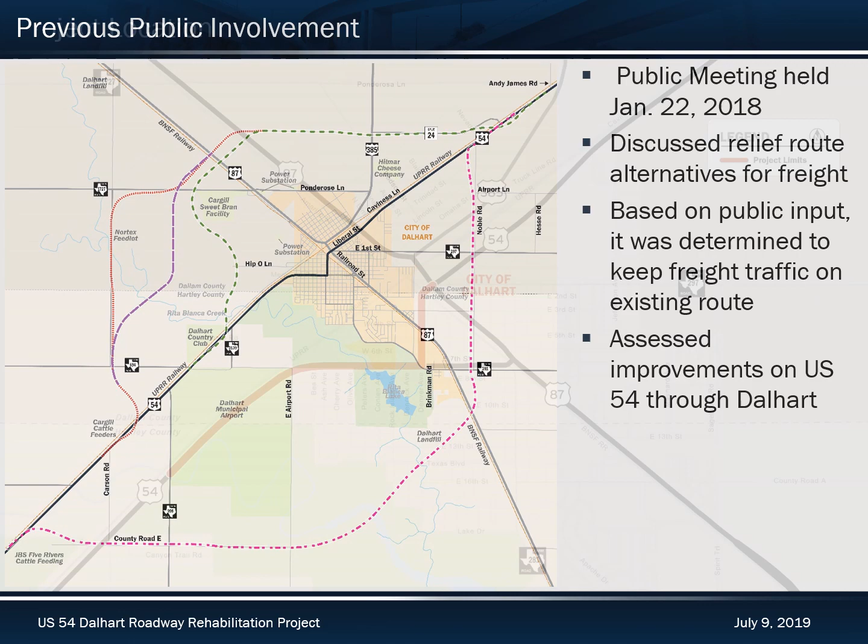The US 54 Roadway Rehabilitation Project limits extend along US 54 into the City of Dalhart for approximately 1.8 miles, from the Rita Blanca Creek Bridge to US 87 in Hartley and Dallam counties. The US 54 facility is part of the Texas Highway Freight Network and is a primary southwest to northeast thoroughfare through the City of Dalhart. The project is needed because the current freight traffic is resulting in a deteriorating asphalt roadway.

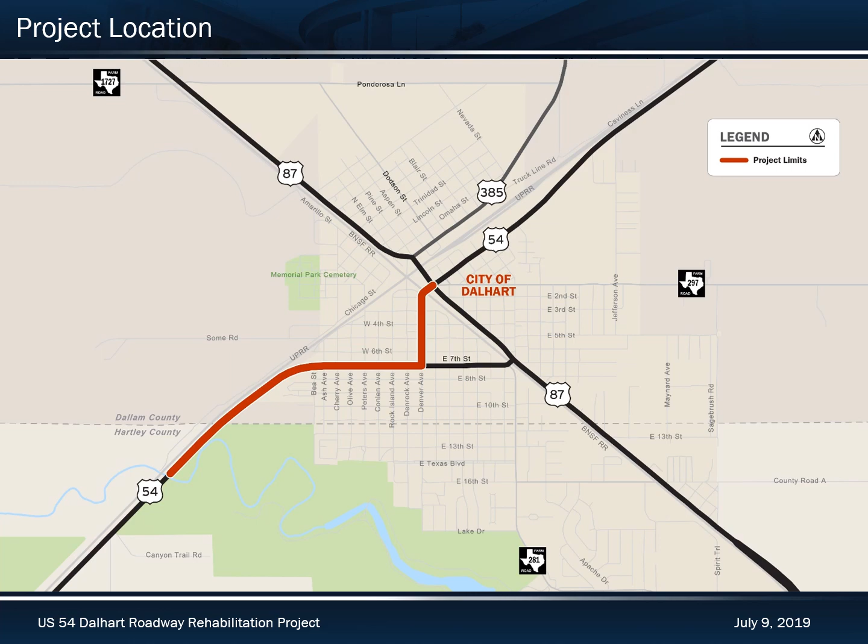The project scope includes rehabilitating the existing US 54 roadway from the existing pavement to long-lasting, durable, low-maintenance concrete pavement. Between the Dalhart city limits and the 7th Street Denver Avenue intersection, the project proposes a 3-lane section. Between the 7th Street Denver Avenue intersection and US 87, the project maintains a 4-lane section. We will discuss these sections in more detail later in the presentation.

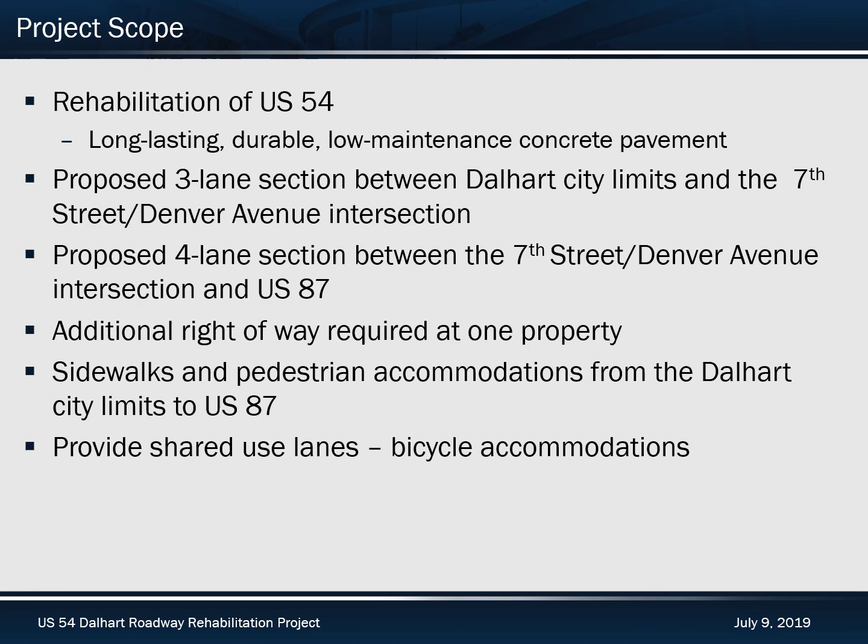The proposed project does require additional right-of-way at one property in order to improve truck turning movements. There are no residential or commercial displacements. TxDOT staff can assist you should you have questions regarding the right-of-way process. The project will also include sidewalks and pedestrian accommodations from the Dalhart city limits to US 87 and shared use lanes for bicycle accommodation.

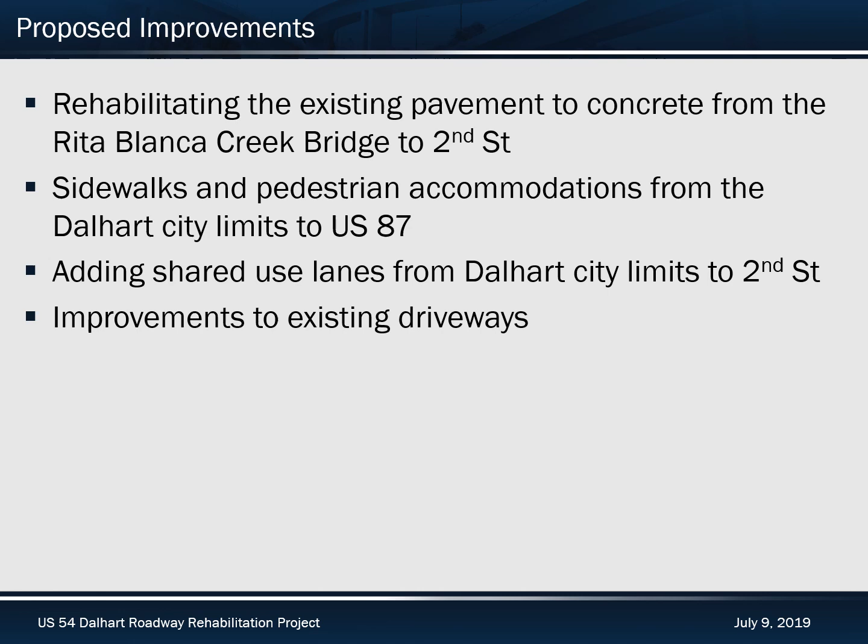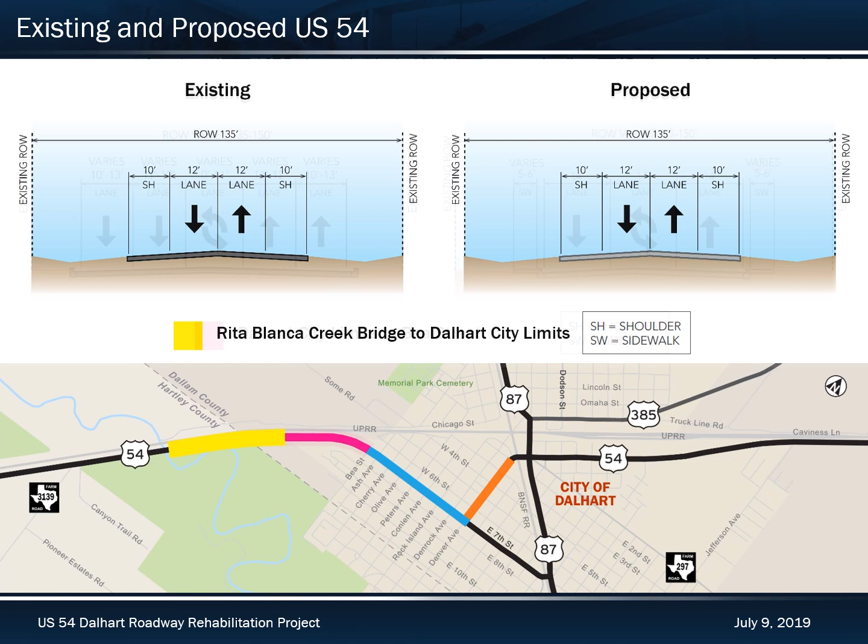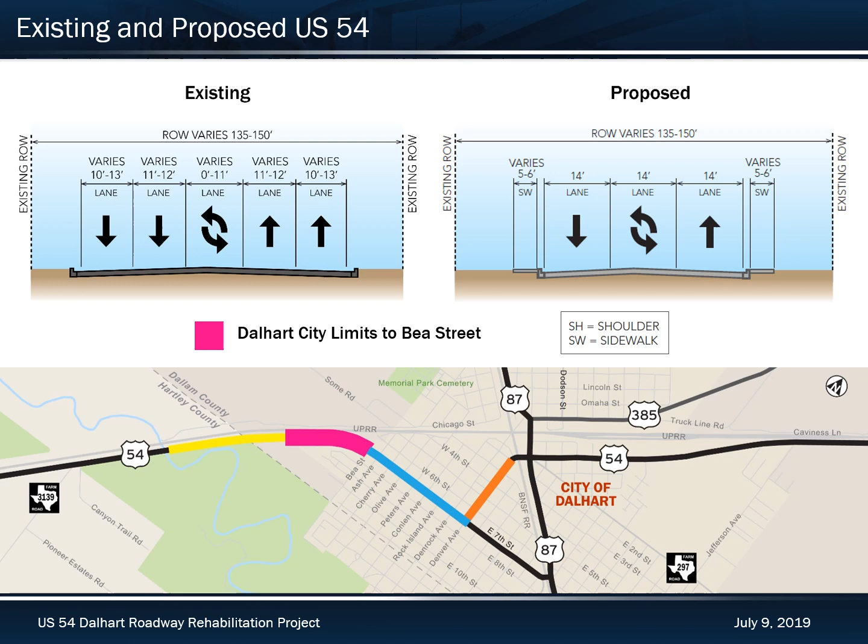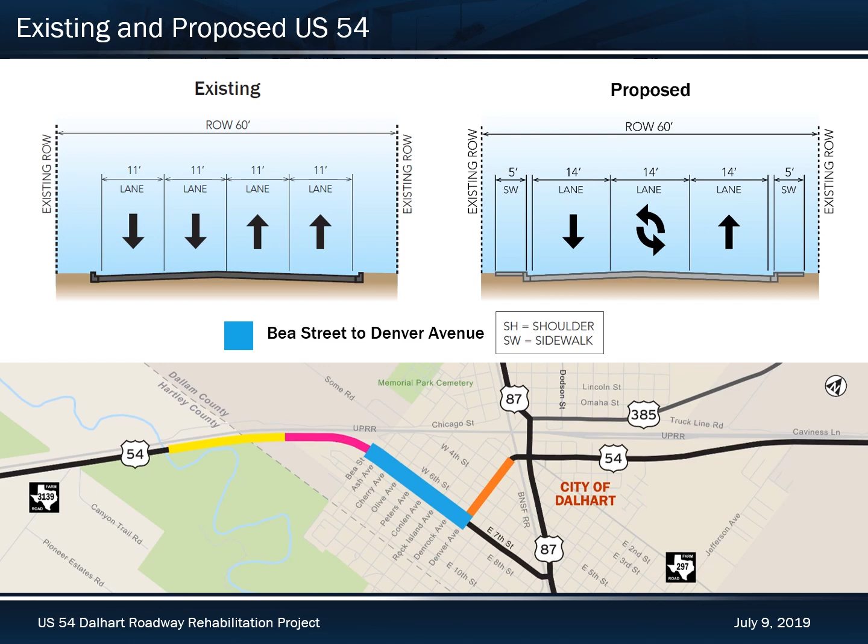And a 14-foot center turn lane. The proposed section will also include continuous 5-foot sidewalks.

The proposed 3-lane section in these locations will provide 1 14-foot lane in each direction and a continuous left turn lane in the center. The addition of this continuous left turn lane through these sections will improve traffic operations by allowing left-turning vehicles to move out of the through travel lanes instead of slowing and stopping in the inside lane to wait for a gap in traffic in the opposing direction.

In the existing 4-lane configuration, through vehicles must change lanes to pass or wait for the vehicle in front to turn.

Currently, the existing lane widths do not meet current standards for 12-foot inside lanes and 14-foot width outside lanes. The 14-foot shared use lane is needed to meet current requirements for bicycle accommodations. TxDOT proactively plans, designs, and constructs facilities to safely accommodate bicyclists and pedestrians in accordance with the U.S. Department of Transportation policy statement on bicycle and pedestrian accommodation.

The limited right-of-way width in this section sets the roadway width for the entire project limits from the west city limits to the Denver Avenue intersection and prevents any widening of US 54.

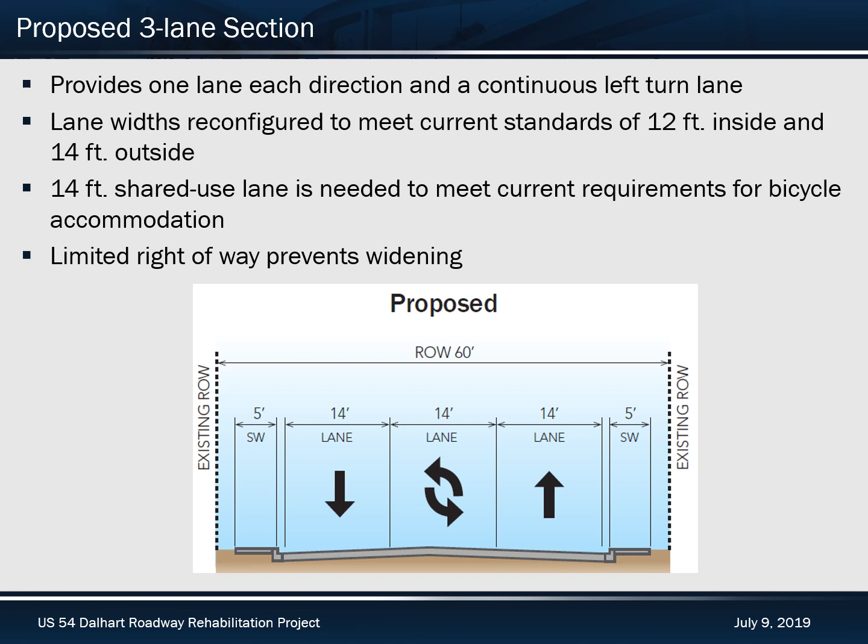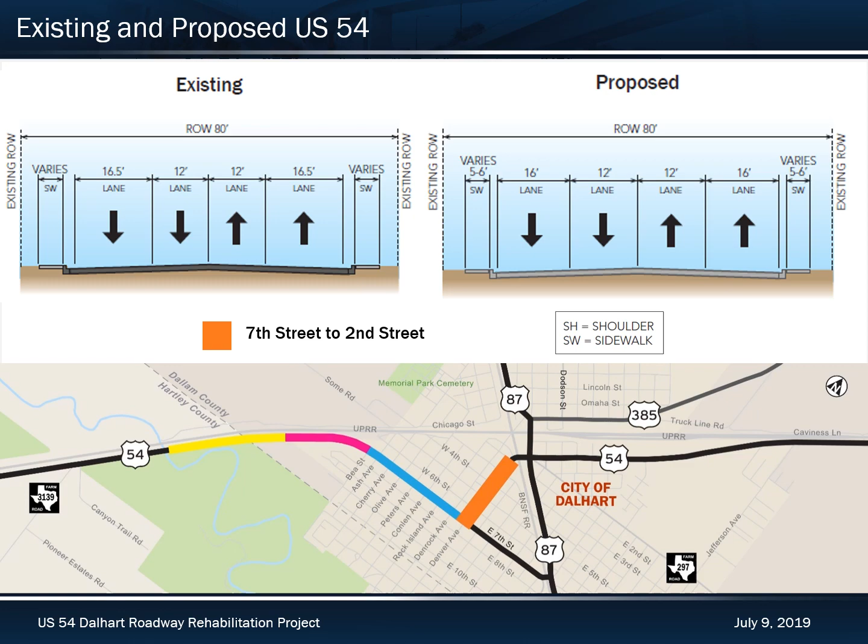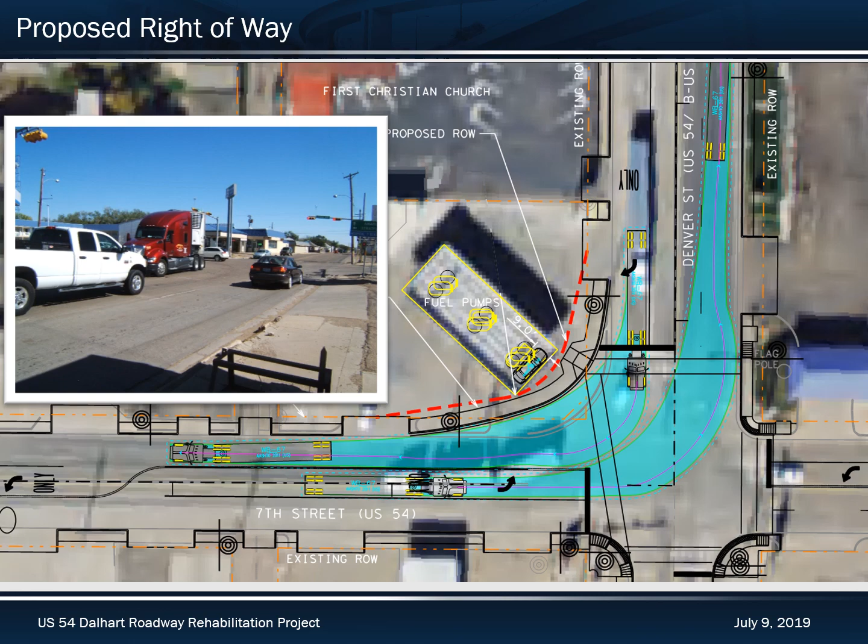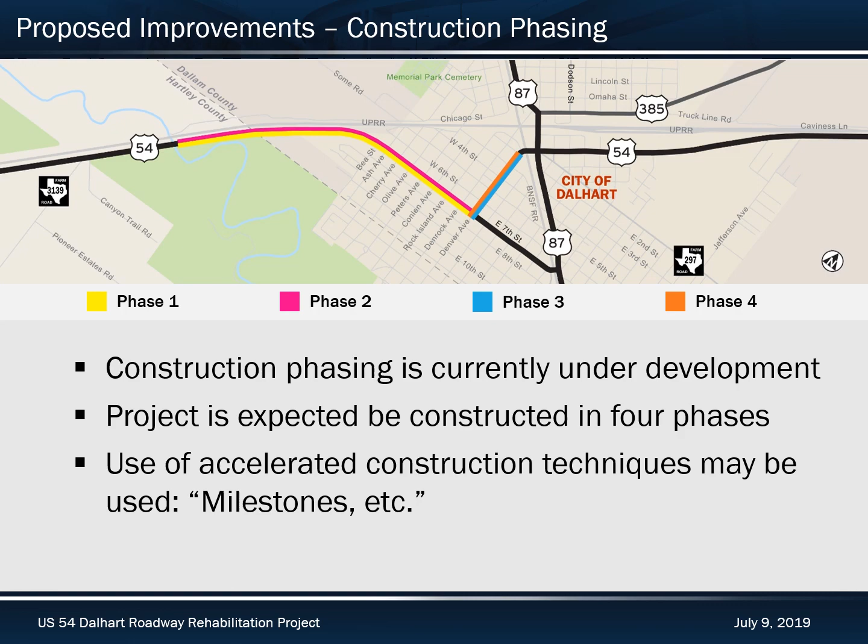A construction phasing plan is currently under development, but it is anticipated that the majority of roadway construction will be completed in 4 phases. The use of accelerated construction techniques, such as milestones, may be used to encourage early completion.

Phase 1 of the construction phasing, shown in yellow, consists of reconstructing the eastbound lanes between the Rita Blanca Creek Bridge and the 7th Street Denver Avenue intersection. All traffic would be shifted onto the existing westbound lanes, shown in magenta on the map. Construction would be staged to maintain access to properties along US 54.

Phase 2, shown in magenta, consists of reconstructing the westbound lanes between the Rita Blanca Creek Bridge and 7th Street Denver Avenue intersection. All traffic would be shifted onto the newly reconstructed eastbound lanes, shown in yellow on the map. Construction would be staged to maintain access to properties along US 54.

Phase 3, shown in blue, consists of reconstructing the northbound lanes between the 7th Street Denver Avenue intersection and US 87. All traffic would be shifted onto the existing southbound lanes, shown in orange on the map. Construction would be staged to maintain access to properties along US 54.

Phase 4, shown in orange, consists of reconstructing the southbound lanes between the 7th Street Denver Avenue intersection and US 87. All traffic would be shifted onto the newly constructed northbound lanes, shown in blue on the map. Construction would be staged to maintain access to properties along US 54.